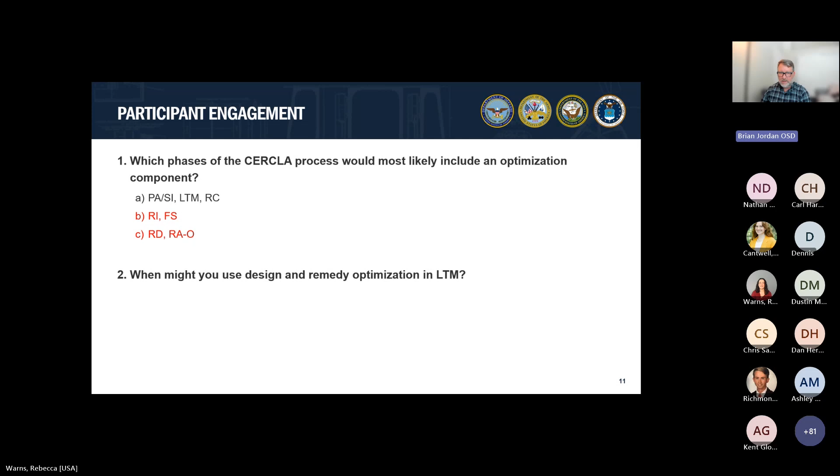So overview of DoD component process. We'll go to the next. So here we have the DoD components in their different processes. You'll notice we have Army, Navy, and the Air Force represented.

So included on the slide are the policies and guidance documents that inform the department's treatment optimization efforts, policies such as the DERP manual, in the blue box above. So what are some of the overarching policies? The DERP manual, the Office of Management and Budget Circular A131, and the Environmental Protection Agency's 5-year review guidance inform optimization efforts across DoD. Each DoD component may also issue additional optimization policy and guidance specific to their unique missions and requirements.

All right, and here are a few examples of that from the Army, the Navy, and the Air Force, and some of that specific guidance. So next slide.

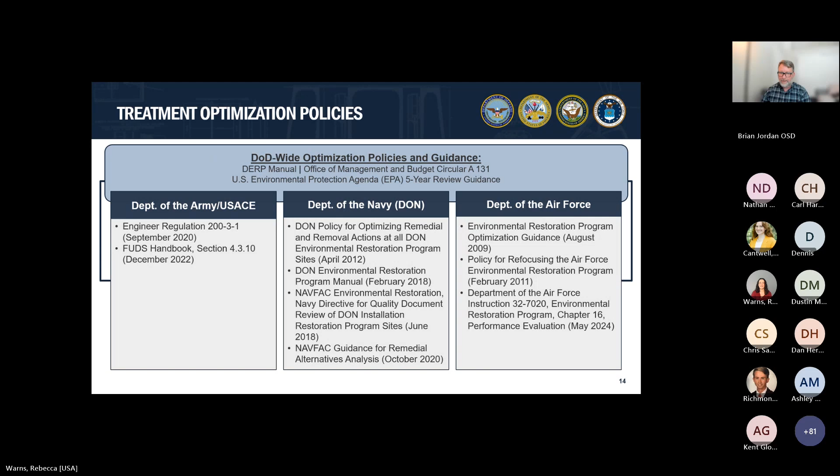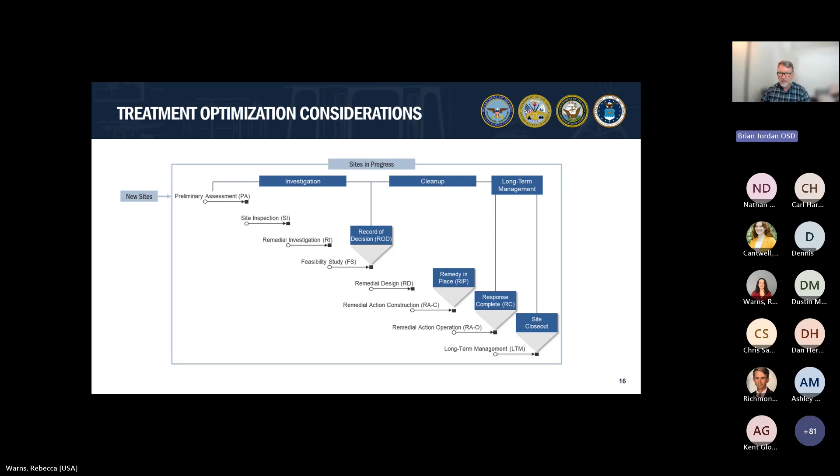All right, next slide. All right, before I get into the next slide, I just wanted to throw this up as a reminder of our process, right? It's always good to quickly throw back up one of the key things. So we'll be talking about the different aspects of optimization in each individual phase. So where do we see these elements at? Next slide.

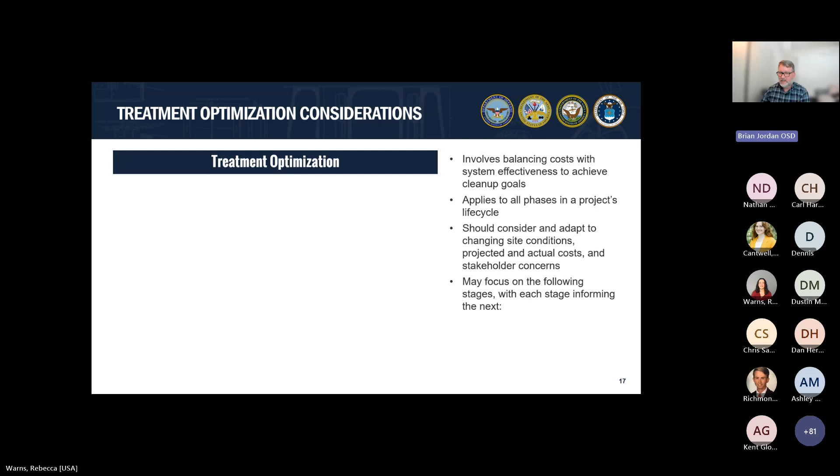So treatment optimization, how does DoD look at that? Treatment optimization involves balancing cost and system effectiveness to achieve cleanup goals, integrating optimization into all phases of a project's life cycle, considering and adapting to changing site conditions, projected and actual costs, and stakeholder concerns.

The department considers treatment optimization in 3 stages: design, remedy, and monitoring. These stages may also correspond with specific CERCLA phases. For example, design optimization is most likely considered in the FS and initial RD phases. The DoD components may integrate remedy optimization later in the RD and RA phases. And finally, DoD considers monitoring optimization during the RA-O and LTM phases.

Treatment optimization is an iterative process where DoD not only collects data and adjusts optimization efforts within each stage—design, remedy, and monitoring—but each subsequent stage informs the next. So sometimes, if at the LTM stage you're no longer protective, you may need to go all the way back to design optimization to figure out a new design to get you to where you need to be. Hopefully we don't end up there, but sometimes that can happen.

So I just wanted to highlight this figure, which is pretty good to show how we look at different phases of treatment optimization in the CERCLA process. Hopefully I can get a few thumbs up that this makes sense. This is a key concept, and we'll be exploring each aspect of it as we go throughout the day. Thank you for the thumbs up.

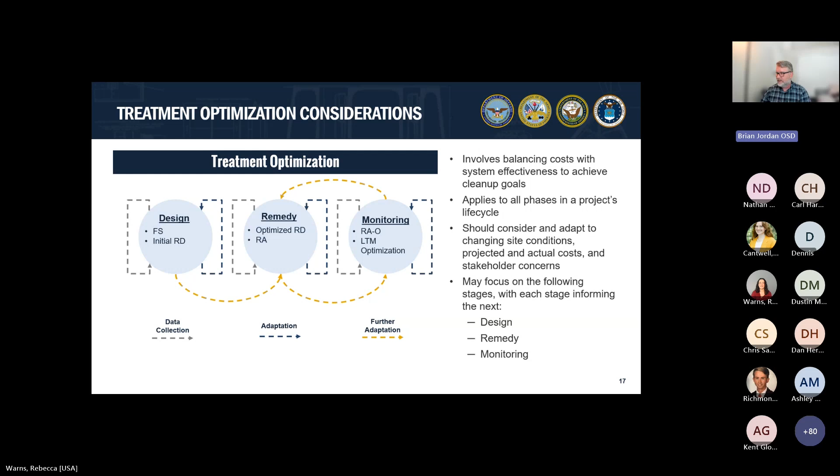All right, next slide. We'll move right into that first phase, design optimization. The goal of design optimization is to enhance treatment operation and effectiveness while minimizing cost. These efforts begin in the FS phase and run through the record of decision and RD under CERCLA. Design optimization evaluates existing standards, constraints, design criteria, and assumptions. It also examines treatment components, processes, and control systems.

Included on the right are methods that each DoD component uses to implement design optimization into their cleanup efforts. I highlight some of those there, as well as some examples that Dennis provided us from Alaska, looking at applicable ARARs and other requirements, and input from the Restoration Advisory Board—some of those other key inputs to what needs to happen in your design for optimization.

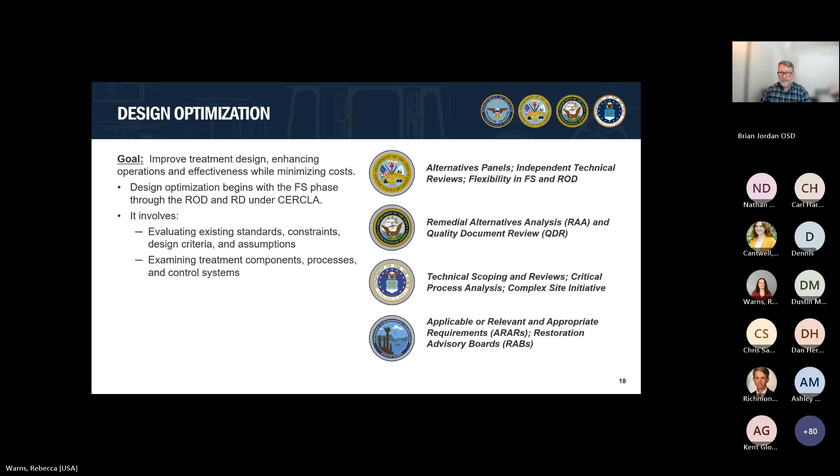All right, and with that, we'll go to the next slide for the Navy. So I'll introduce Nathan, and he closed the window, so I don't get to pick on him that he's coming in from a secret location because he's not backlit anymore. That wasn't very nice of you, Nathan. All right, Nathan, take it away.

Thank you, Brian. Yes, I'm Nathan DeLong from the Navy. As far as design optimization, the Navy really has two main policies that assist with that. The first is the Remedial Alternatives Analysis, or RAA, and the other is the Quality Document Review, or QDR. The RAA is a required document for any site going through the initial remedy evaluation process.

It's intended to be a very short, internal Navy document, ideally completed with a minimal level of effort—about 5 to 20 pages and no more than 24 to 40 hours total. The goal of the RAA is to get an early and quick review of the potential remedial alternatives from Navy SMEs through their review of those documents.

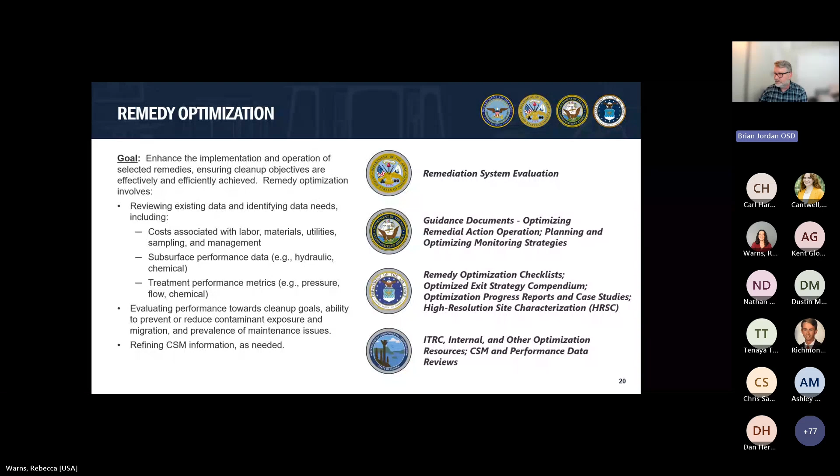prevalence of maintenance issues. Also included on this slide are methods through which DoD components may incorporate remedy optimization in their cleanup processes. So those are on the right, and we will go over to Dr. Kent Glover with the Air Force for a discussion on remedy optimization.

Thank you. On this slide, we're highlighting 3 initiatives in the Air Force that we used for remedy optimization. The first, performance assessments, are technical reviews that validate progress toward contractual objectives and identify corrective actions when progress doesn't align with site performance models.

Critical process analysis is an initiative where we identify critical remediation and fate and transport processes that are limiting progress of a remedial system. Often we recommend high-resolution site characterization to refine conceptual site models at the critical process scale and spot remedy performance problems early. And finally, recommend remedial enhancements and trigger management actions before problems become critical.

And finally, network optimization, which are statistical and decision logic evaluations of monitoring networks to provide guidance for optimal and cost-effective remedy performance tracking, and to ensure that monitoring data support exit strategies for remedy completion.

Yeah, so Alaska uses ITRC guidance quite frequently. We have internal and other optimization resources as well, just to determine data needs and to verify that monitoring parameters appropriately measure progress towards the cleanup goals. We evaluate the conceptual site model and performance data through monitoring and use that to identify any data gaps and reassess assumptions just to ensure that the remedy is performing.

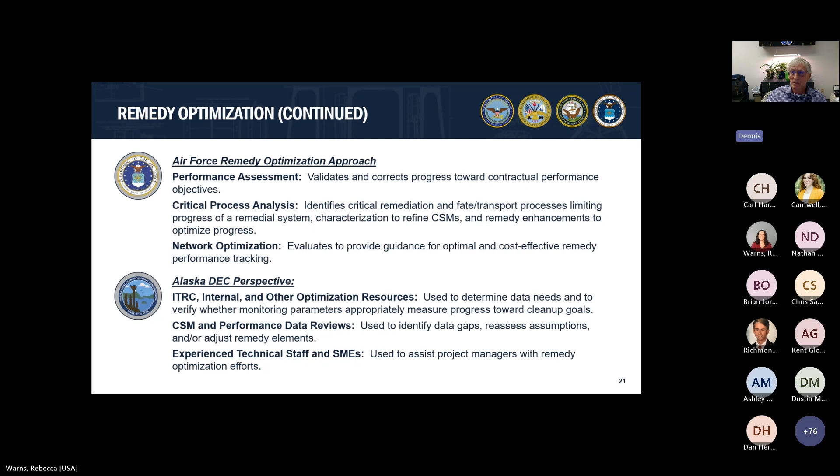Thank you. Over to you, Brian.

All right, and for our last phase, monitoring optimization, I'll hand over to Carl and the Army with the U.S. Army Corps of Engineers. Well, hi, everybody. It's great to be here, be part of this team that's presenting on treatment optimization. So a little perspective on how the Army Corps of Engineers looks at monitoring optimization.

The general concept with monitoring optimization is pretty simple and straightforward. Good monitoring programs really give us the data that we need to track our treatment progress and make informed decisions about those next steps. On the flip side, bad monitoring programs can either cost us too much money and generate data that we don't really need to evaluate our treatment, or we can not be generating enough data that we need to be making those informed decisions.

And that simple concept is really what drives us to the goals of monitoring optimization, trying to improve our effectiveness and efficiency. A little bit more on cost. Monitoring can represent a pretty significant cost overall and level of effort.

On the slide, we show annual costs depending on size and complexity of the site in the tens to hundreds of thousands of dollars. And those costs aren't just the costs that you pay to have people go out and collect the samples and then pay the lab to analyze. You also have those upfront costs with planning and preparation, and then on the back end you have costs associated with validating your data, reporting your data. So just another reason we want to have an optimized, efficient monitoring program.

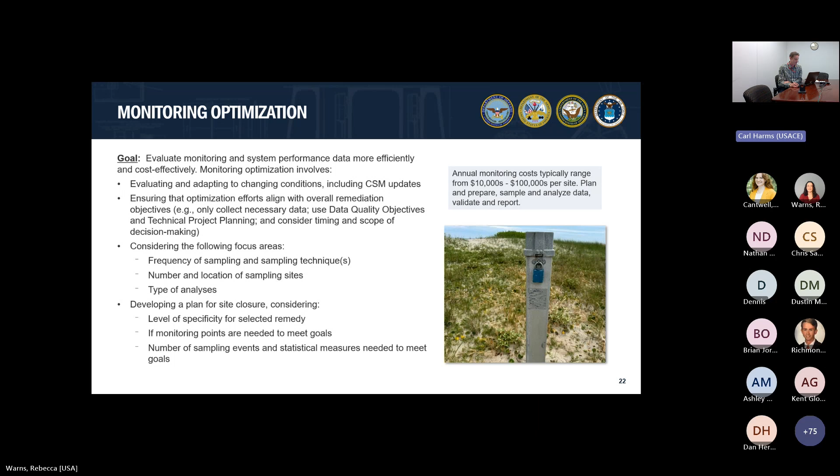Maybe they paid for a fresh apple in Alaska before and know that that's a $3 sign engagement.

All right, thanks for those responses, Dennis. I think we can go on. I think we would all agree it's probably a $3 sign endeavor in Alaska. Yeah, I would think so.

Yeah, some of our unique environmental considerations for installing remedies are, we have huge temperature swings through the year. I mean, temperatures are below freezing and below 0 degrees Fahrenheit for nearly 7 months of the year here. We have a limited field season for drilling, excavation, construction, and other optimization or remedial activities.

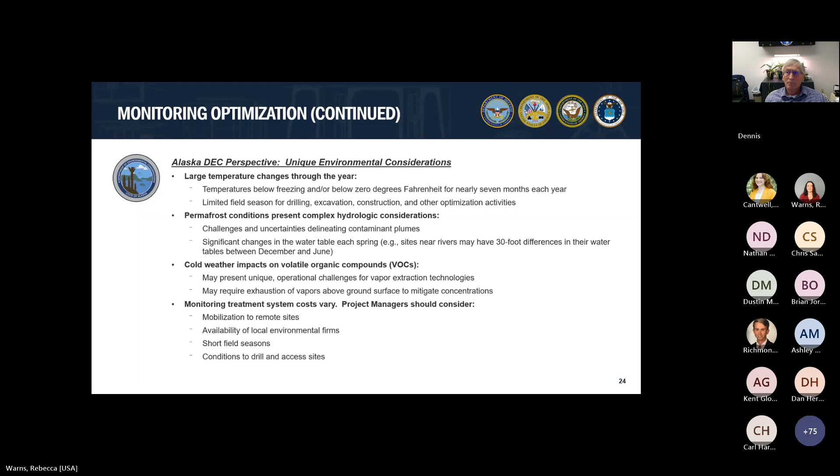So we had early on, when we looked at the figure for CERCLA, and we have remedy in place, there was an ask of whether we do a formal declaration similar to EPA. I would say I have not seen that as a big push for DoD, that we do that formal declaration of remedy in place.

Usually what I've seen, my experience, again, I am speaking from very much Brian's personal experience working in the Superfund program for EPA, is that remedy in place formal declaration was one that kicked off the 5-year review calendar for EPA, and also particularly if it was a fund lead site, also kicked off in many cases the 10-year clock for when the state would need to take over the site or take over 90% of the funding

of the remedy. So for EPA and a state entity, it was very important that they all settled on when they felt the remedy was in place. For DoD, because we will be carrying out the remedy throughout its life, that remedy in place declaration is less formal. We do formally identify it, but it's less formal about, oh, has the treatment system been up and running for 92% of the time or something like that.

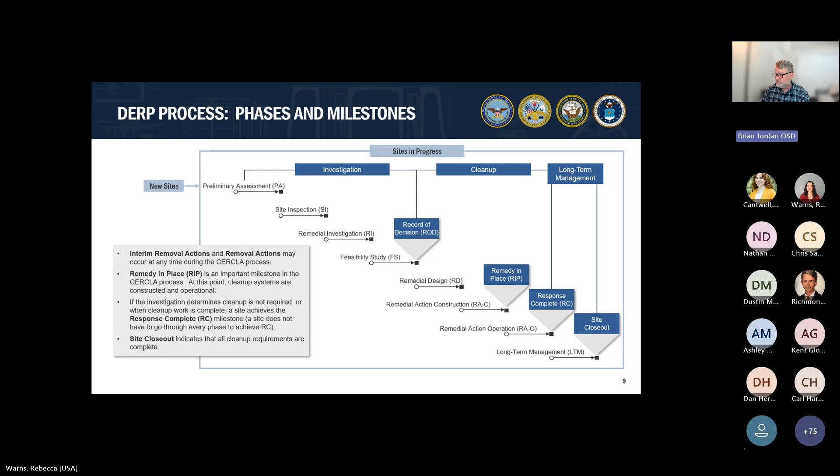We'll go ahead and get started looking at optimization data needs. We kind of ended up with that discussion as far as monitoring and monitoring programs and how data really feeds those monitoring programs. And we'll talk about some of the optimization data needs. And I will hand back over to Carl, and Carl's going to kind of walk through some of what the foundations for optimization data needs are.

Yeah, thanks, Brian. And one thing I like to mention here as kind of an underlying concept for how the Army Corps of Engineers views optimization data needs is that we prefer to do our optimization with teams that are either fully independent or, you know, a blended team of independent people and people that work on the project.

So with that in mind, it's really important to discuss the data that's needed to do optimization, and the quality of an optimization effort is really going to depend on that independent or semi-independent team having access to the necessary data. On this slide, I use the term data, but it's a pretty broad tent. It includes actual electronic data, but things like documents, interview information, site visits, etc.

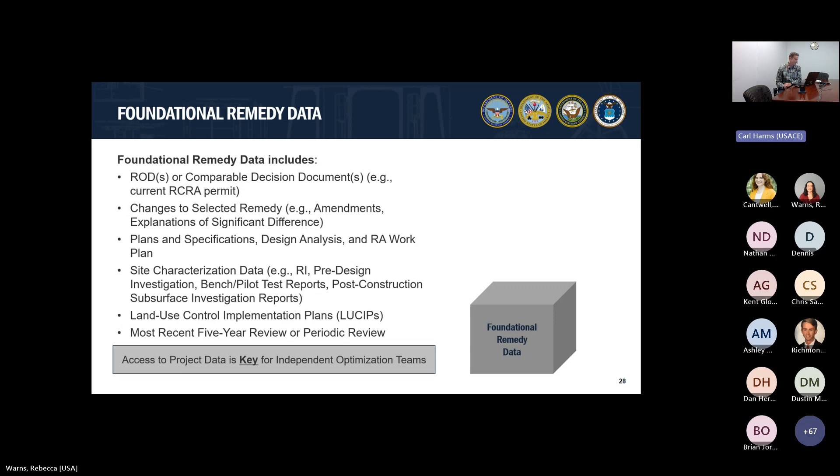Last thing on this slide and this foundational data concept is that having access to that foundational data is key when you have an independent optimization team. They really need to understand the remedy that's been selected and implemented before they try to go about improving it. So we'll talk on the next slide about the data that we look at for that improvement process.

So current remedy data: after the optimization team has digested that foundational data, they're really going to spend most of their time evaluating current data that's being generated as the treatment or the remedy is implemented.

A good foundational or key document to look at when you're trying to understand current data is your quality assurance project plan, or if you're under some other type of sampling design document, you'll want to have that for the optimization team. And then periodic monitoring data is going to be key.

That can be things like status reports that are prepared at some kind of regular frequency. Think of your quarterly activity reports or your annual activity reports, or however your operations and performance data are reported. The optimization team is going to use that data to basically do an independent evaluation of how the treatment is progressing at the site.

One thing I'll say, definitely a best practice if you're ever on the end of needing to provide data to an optimization team, is that having this current data in electronic format, electronic database outputs, is ideal. That really saves the team from having to generate electronic data from Excel tables, or worse, printed PDFs. It certainly can be done, but it adds complexity and time to the optimization effort.

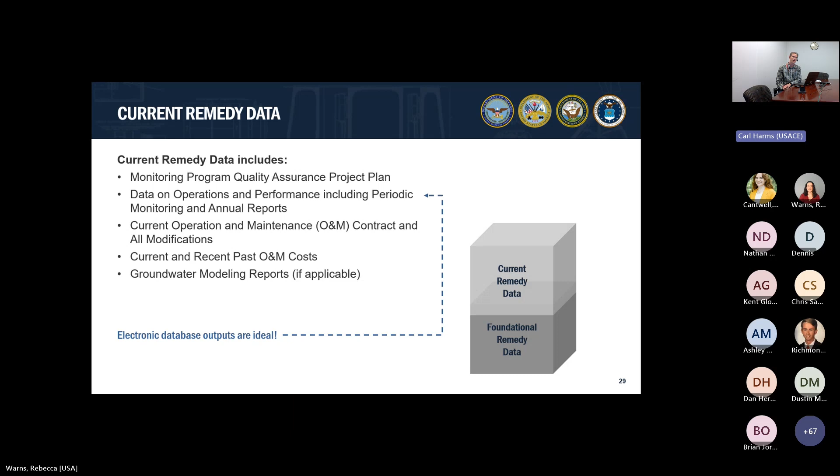And then we'll talk on the last slide here about what I conceptualize as the supplemental remedy data that the optimization team will want to look at. What we talked about on the first two slides is really data that's going to be provided to the team. But the optimization effort itself does generate some data that needs to be considered as the treatment optimization is happening.

Site visits are highly encouraged in the Army Corps of Engineers whenever we're doing optimization, unless it's a site that's difficult to get to, or there's just not a lot going on at the time, and a site visit's really not worth it.

During the site visit, the optimization team is going to fill out checklists specific to the type of treatment technologies that are being used. They're also going to potentially interview personnel that are doing operations and maintenance of the treatment systems, potentially property owners, regulators, or other stakeholders that are involved or have interest in the treatment system.

If a site visit isn't completed, we definitely recommend that the team tries to look at recent site photos to help get that ground truth understanding of the site. Other really important data that the optimization team should be looking at is correspondence from the regulators and stakeholders to the remediation project team. That can be a really important and sometimes overlooked data set that we want to look at during optimization.

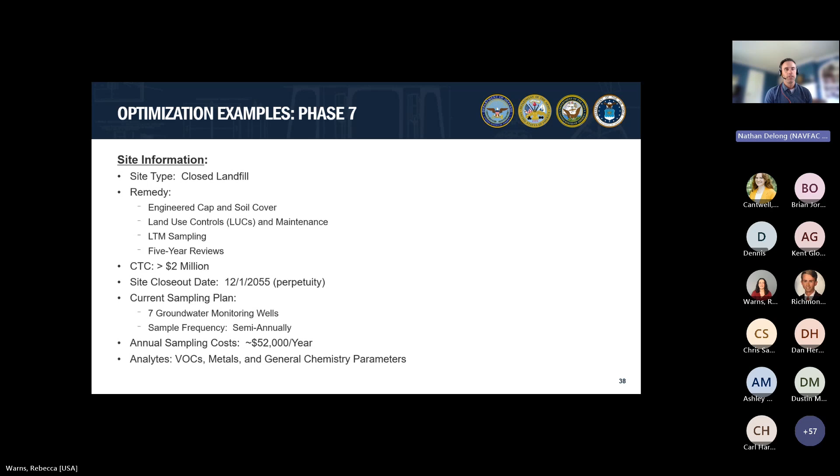So we go about and perform an optimization study on this site. It's a mature site, we have lots of data, and the partnering team, which includes the Navy, its contractors, state and federal regulators, all have that discussion about, hey, we have a lot of data for this site. We have a really good idea of what is happening there, what is needed and what is not needed. So they come to agreement on an optimization effort for this site.

And that agreement comes down to reducing the sampling frequency for VOCs to every 5 years and metals to every 2 years. So significant savings on sampling costs, having to go out there once every 5 years for VOCs, and metals every 2 years, as opposed to twice a year. And then we also reduce the metals to the specific contaminants of concern and eliminate dissolved metals, also saving money in that sampling effort.

So as that impact, we're going to look at $42,000 per year in cost avoidance, and then also an additional reduction in other resources, which are not shown here, but would be captured on the impact tab that I showed previously. So how that $42,000 per year cost avoidance plays out is you would multiply that by 30, and we'd get the total cost avoidance there of, I believe, $1.26 million. The implementation cost in there is only an estimate of the people's review time of the updated O&M plans for that landfill.

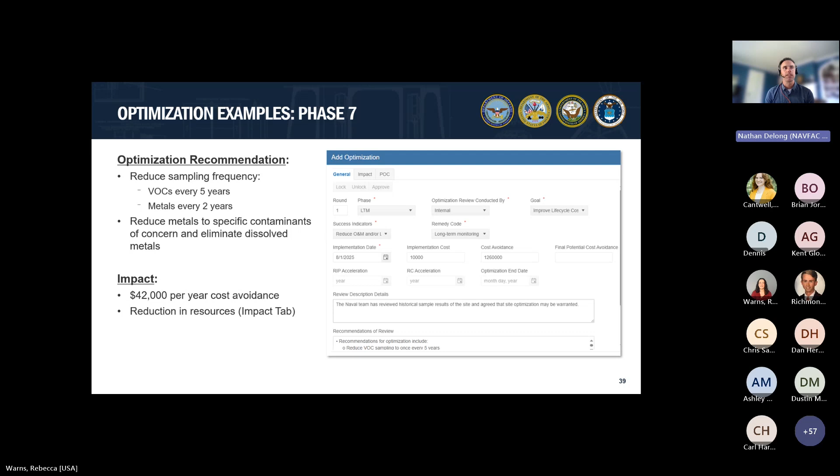With that, I think we're going to get into some optimization success stories, and we'll start out with Dennis Shepard from Alaska to get us started on success stories. Thanks, Nathan. I guess we can go to the next slide.

So I'm going to talk about the former Galena Forward Operating Location. It's an Air Force BRAC site in Galena, Alaska.

These two sites had similar contaminants of concern: DRO and PAHs in the surface soils, and TCE contamination in surface soil, subsurface, and groundwater.

Soil concentrations were up to 1900 milligrams per kilogram in the vadose zone, and variably saturated zone up to 6 milligrams per kilogram in saturated zone soils. Groundwater was contaminated up to 7,600 micrograms per liter at 50 feet, up to 40,000 micrograms per liter historically documented for this site.

The cleanup levels for this site are the Alaska cleanup levels, Table C groundwater cleanup levels.

The remedy was installed in 2018: excavation of the DRO and PAHs, and then installation of permeable reactive barriers, upgradient of the SS06 area because we have changes in groundwater, so we have a losing river to gaining river situation. So there was an up-gradient PRB installed, and then one just down-gradient from the SS06 area, and then one just down-gradient of SS19.

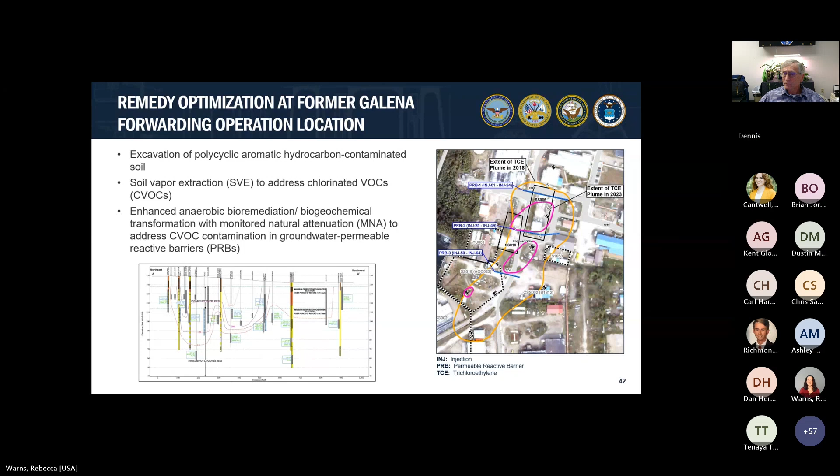Let's move to slide 43, please. In 2019, a soil vapor extraction system was installed to address the chlorinated volatile compounds. There were 51 wells put in.

38 were shallow wells to address the shallow soils to about 15 feet, with a radius of influence of about 20 feet, shown there on the left-hand slide. The right-hand slide shows the 13 deeper vent wells that were installed up to 30 feet of depth to address the deeper contamination.

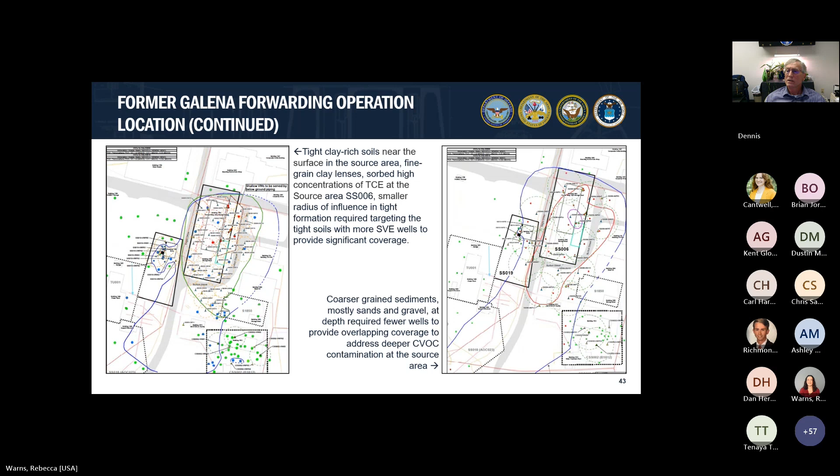If we could go back to slide 42 for a minute and take a look at the cross section for this area. I want to point out the water table, the blue dashed lines across here. The lower line indicates the groundwater elevation during winter, and the upper blue line indicates the groundwater elevation during summer months. So there's about a 23-foot smear zone there that affects the operation of the SVE system.

The system is seasonally shut down during high groundwater every year, such that the only portions of the system being run during the summer months are those shallow wells. So they are basically optimizing the system by running and maintaining higher flow rates from the shallow system during the summer, and then during the winter months the rest of the system can be turned on for those deeper vent wells.

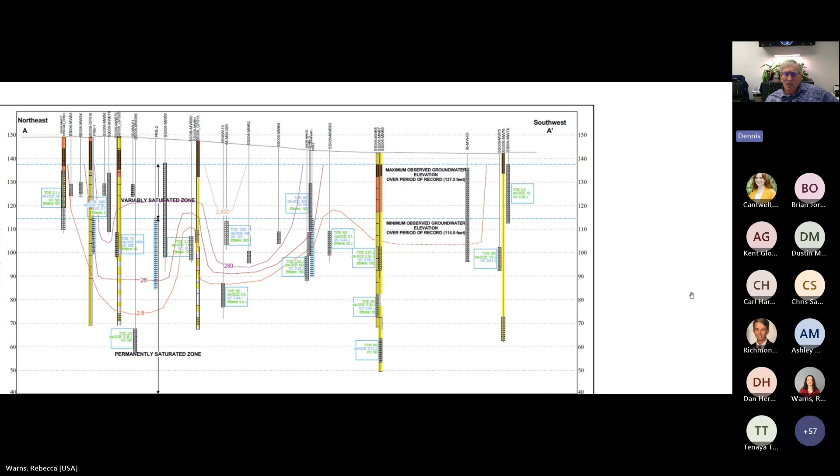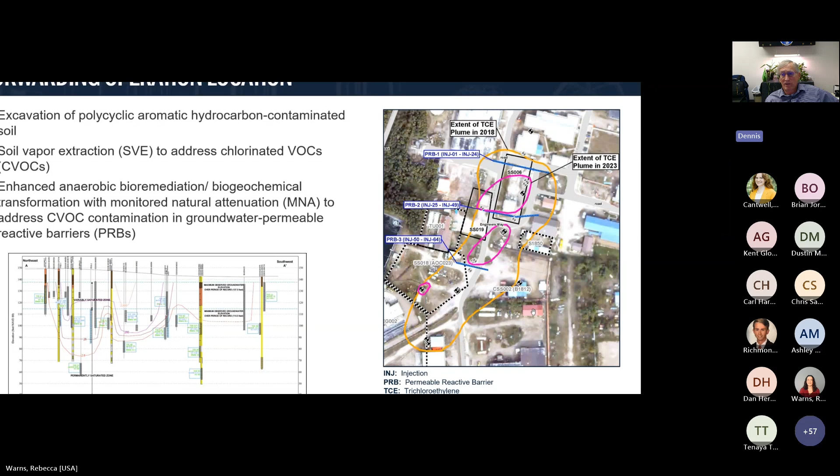If we could back out on that slide a little bit to show the full area - you can see how many buildings there are in this area, so there's a lot of activity. There's a school that runs there during the winter, so there was a large community concern there.

After 5 years of running this system, you can see where the core of the plume is now. The core extended nearly to the foot of the plume as shown there. We have reduced contaminant mass in the SS06 area by 1.7%, and the mass was reduced in the SS19 area by 10%. That's reflective of the coarser grain sands and gravels in that area.

And also the fact that we have less tight grain soils that are holding a large proportion of the mass in the SS006 area. We're expecting rebound from that tight grain soil. We're going to continue running the system, optimizing it, and evaluating the remedy.

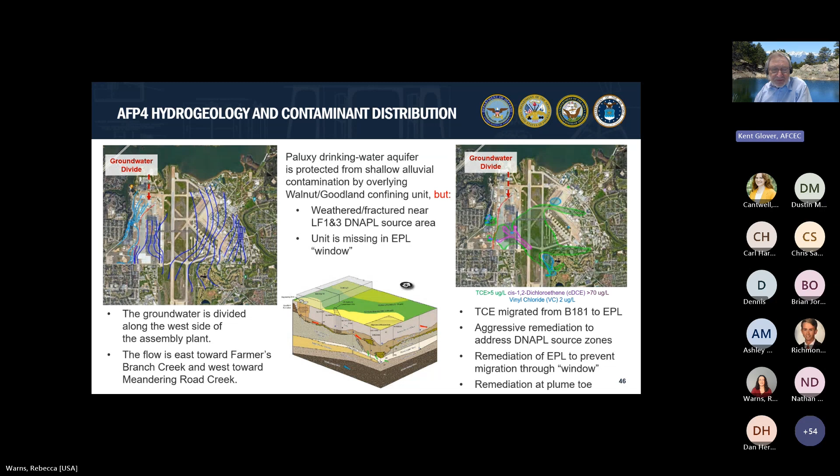So in 2014, 2015, AFCEC Technical Support Division conducted a series of remedy evaluations at Air Force Plant 4 through an enterprise-wide initiative that we call the Complex Site Initiative.

These CSI remedy evaluations looked at three things. Was the conceptual site model adequate at the scale of the remediation systems? Was it adequate to support optimization? What are the critical fate and transport processes that control source zone depletion and plume migration? And were the remedial systems in place at the time effective and progressing towards cleanup goals?

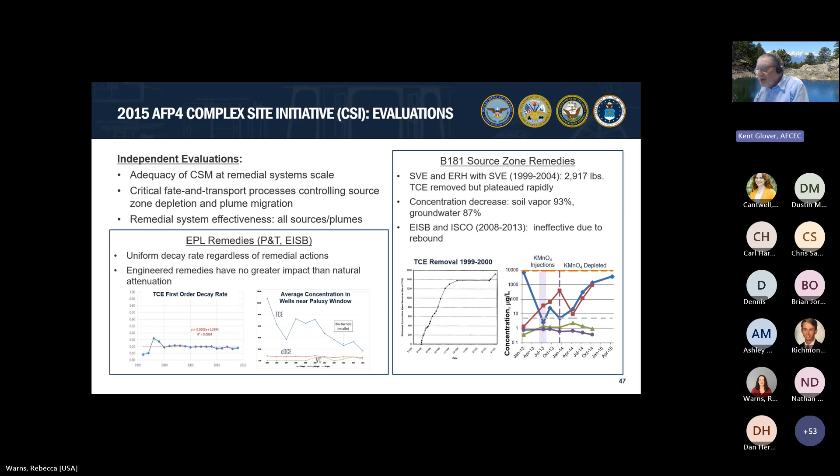So after about 3 or 4 months of detailed evaluations of remedial approaches implemented at these various areas, we came away with 3 critical hypotheses or ideas that we believe controlled remedy effectiveness. One idea was to decrease source area contaminant mass to the extent practical and control mass flux from those areas. Second was active plume remediation efforts and technologies were only minimally effective because of back diffusion. Most of the remaining contaminant mass at the site is tied up in the relatively immobile fraction of the porous media.

And third, in the vicinity of the source areas and the eastern parking lot window, the geological characteristics of the upper Paluxy Formation provided what we thought was good geological containment and protection of the regional drinking water aquifer. So based on these findings, we recommended a transition from use of active treatment technologies to a strategy of MNA and technical impracticability waivers. We thought we had a basis for TI waivers in 3 source areas. As you'll see, we did not get all 3, but we got one.

And we recognized that transitioning to MNA would require remedial action objectives with a long time to attain cleanup goals. But because the future use of the site is going to continue being an aircraft manufacturing facility, a long-term cleanup time was acceptable to everyone. We also recommended conducting a more detailed mapping of plume configuration to demonstrate regional aquifer protectiveness and MNA effectiveness than was possible using the available monitoring network.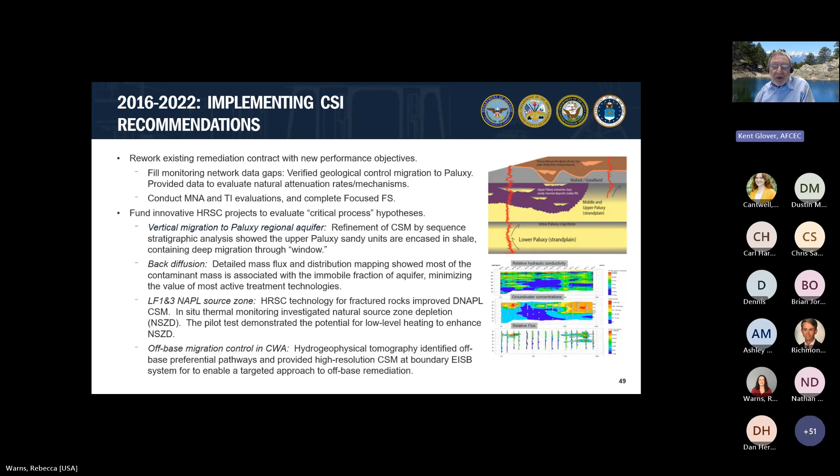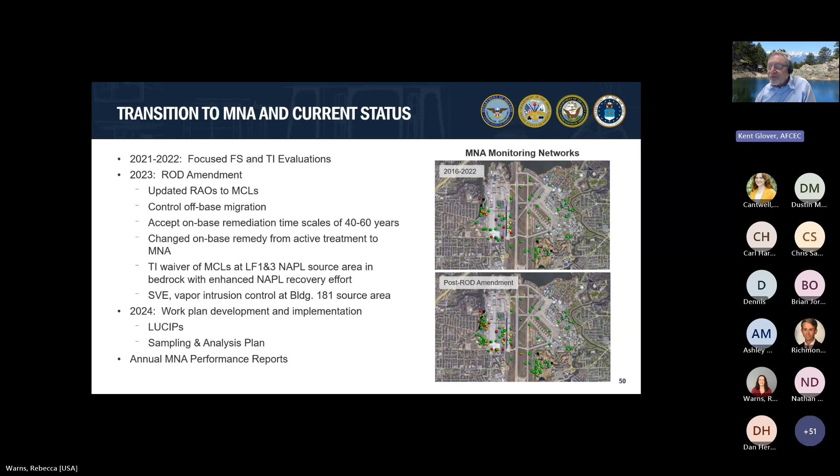Here we go. So, transition to MNA and current status. This slide summarizes where we are today. In 21-22, the focused feasibility study and TI evaluations were completed. In 23, a ROD amendment was signed that formalized the strategy and goals that we talked about here in this case study. And in 24 and today, the work plan was prepared and is now being implemented to include annual MNA reports. So last slide, slide 51.